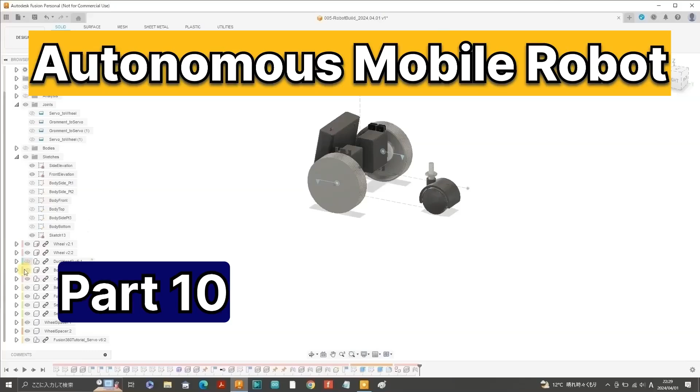In this video, part 10, we'll continue making progress with the chassis design. So let's dive right in.

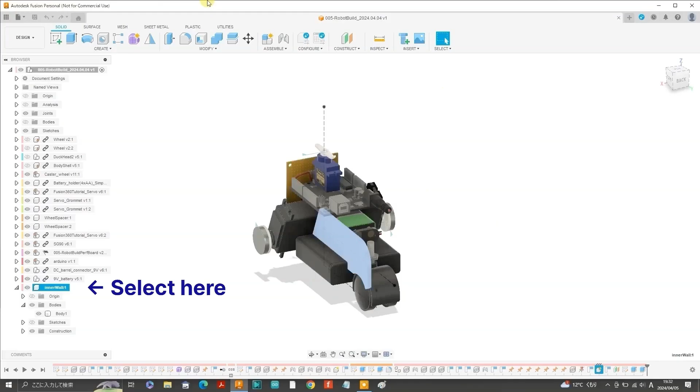We'll begin by duplicating the inner wall. Start by selecting the inner wall in the browser, then use the Move Copy tool, making sure to check the Create Copy option in the Move Copy palette. Move it by 26.4mm plus the 3.7mm thickness of the HDPE board. You'll now have two inner walls on either side of the 9V battery and the caster wheel guard.

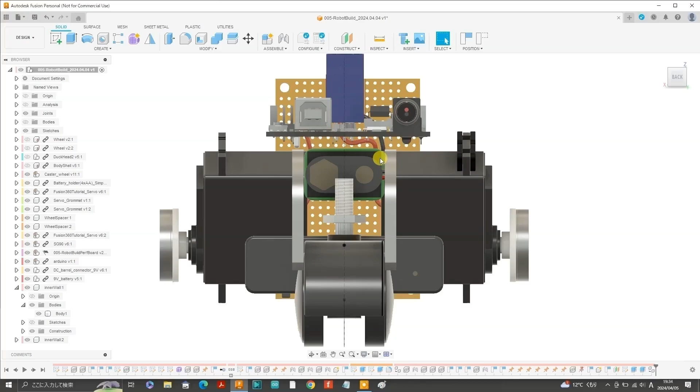Switch to the back view and note where the 9V battery wires extend. I've selected the outer face of the right inner wall. Now press P and select the peripheral shape surrounding the 9V battery wires and also the lower wire here.

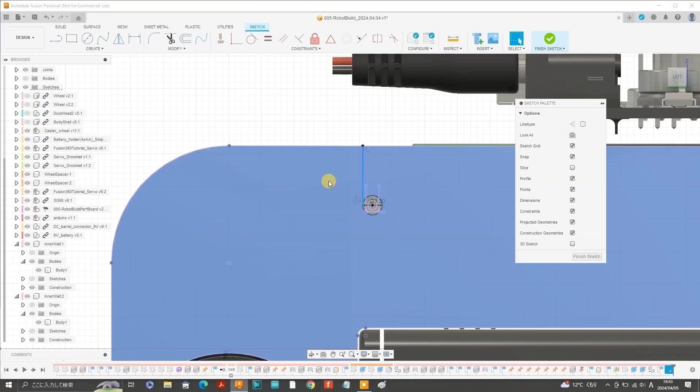We'll make a 3mm circle, draw a line segment, make it tangent to the circle, and make the end of the line segment coincident with the circle. Copy that line segment and make it tangent to the circle on the other side. Use the parallel constraint and then finish sketch.

Select the entire slot and extrude it by 3.7mm in the cutting direction. Now you can see the slots on both sides as the wall is a copy of the other.

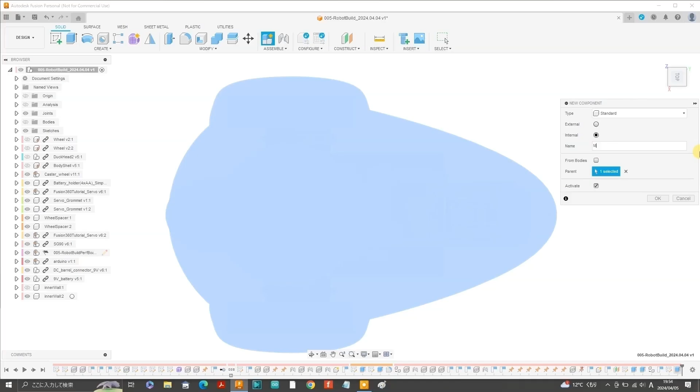Now switch to the top view and create a new component. I labeled it M6 18x1mm washer.

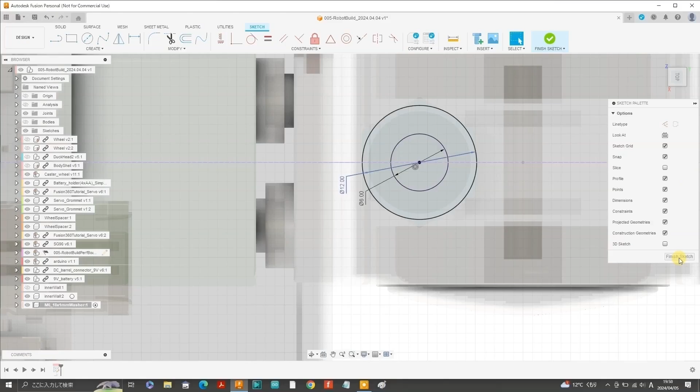Let's create a sketch on top of the hex nut of the caster wheel. Press P to project the vertical shaft diameter, which gives us the center as well. Make a 6mm inner diameter and a 12mm outer diameter. So this is not an 18mm diameter as I mislabeled the component. Finish sketch and extrude the washer by 0.5mm.

Again mislabeled as 1mm. Let's use a fillet of 0.1mm on either side.

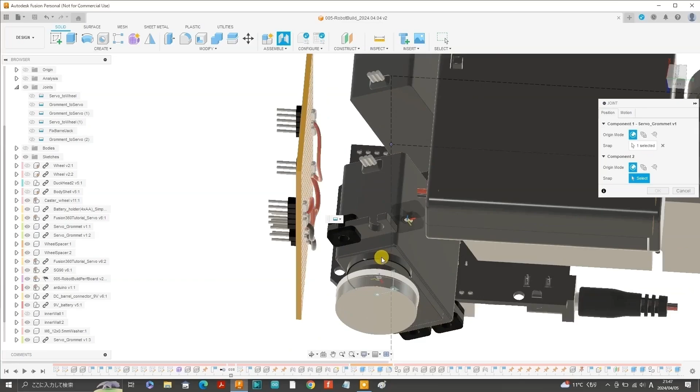We'll scoot over to the HS311 servos and add the remaining servo grommets by copying and inserting them using the joint operation. Now let's measure the distance between the center line and the inner face of the grommets on one servo, which measures 36.65mm, and likewise measure the distance on the other servo, and that also measures

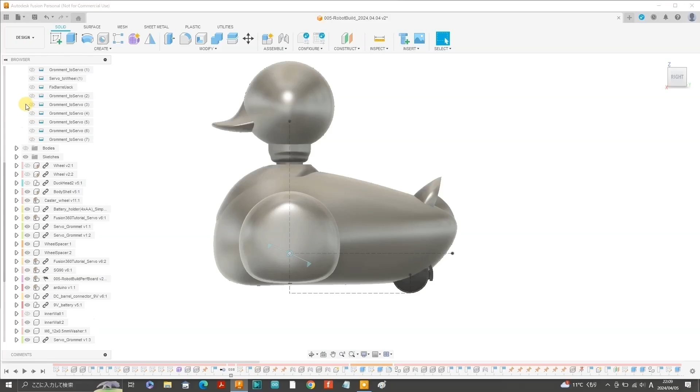36.65mm. Let's unhide the body and create a new component. Label it outer wall. With the outer wall activated, select the inner face of one of the servo grommets

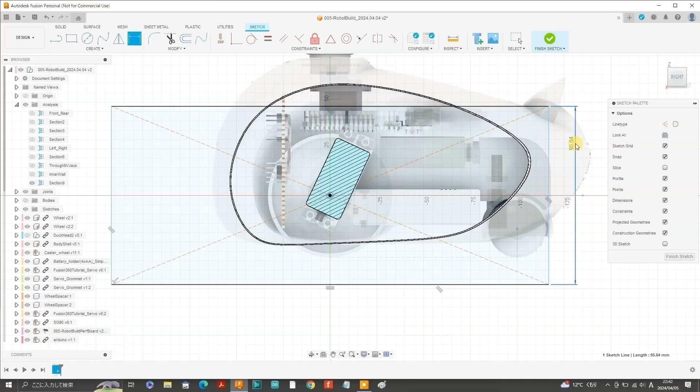and add sketch. Let's swivel the sketch around. Switch on analysis. Now create a rectangle centered on the origin, making sure it's large enough to cut through the robot body shell. I used

220x130mm, which is more than big enough. Finish sketch and extrude the rectangle by 3.7mm, matching the HDPE board thickness. And that's the start of the outer wall.

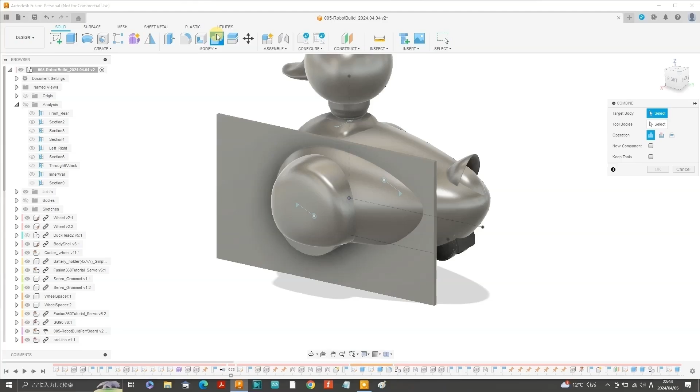But of course we're going to have to trim the outer wall. Use the Combine tool, selecting the rectangular wall as the target body and the robot body shell as the tool body, then hit OK. Now in the browser under outer wall you'll see two bodies. Just hide body 2, and if you hide the robot body shell you'll see the newly cut outer wall.

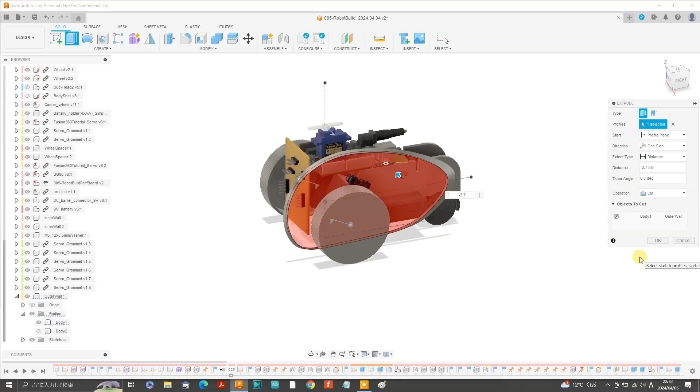Select the outer surface and do another extrusion of 3.7mm, but this time select intersect so that only the extruded part remains. Unhide body 2 and remove it.

Now let's copy that and move it by 73.3mm plus the wall thickness of 3.7mm.

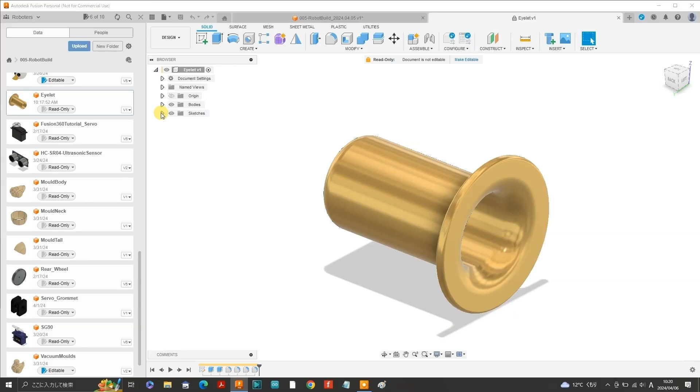Next, let's look at the eyelets. These fit into each servo grommet and a screw is inserted through them to mount the servo. The step file for this eyelet is available on my GrabCAD account. Check the description for the link. Each eyelet has a 2.4mm inner hole diameter, a 3.0 outer diameter for the small protrusion, and a 5.0mm overall

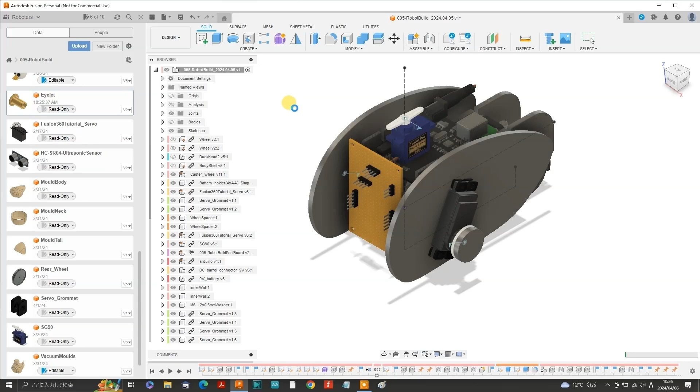outer diameter. Let's insert the eyelets into our design. We'll need a total of 8 eyelets, 4 for each servo. Make 7 more copies and use the joint tool to attach the eyelets to each servo grommet. Now each servo has grommets and their respective eyelets attached.

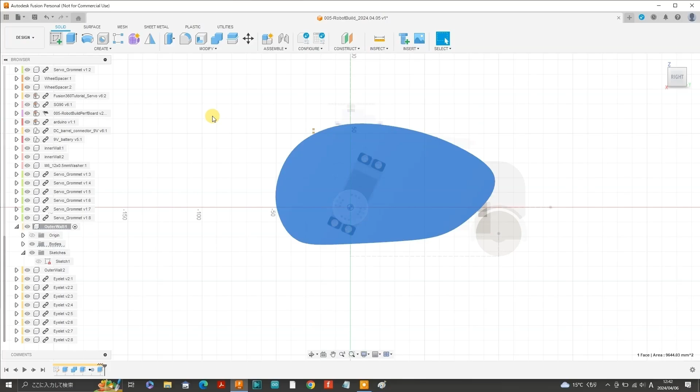Now let's work on the outer wall. So activate it. Select the outer surface and create sketch. Press P to project. Select the face to project the entire outline of the outer wall and project the inner diameters of the eyelets. Let's make some little 1mm holes to help the self-tapping screws along.

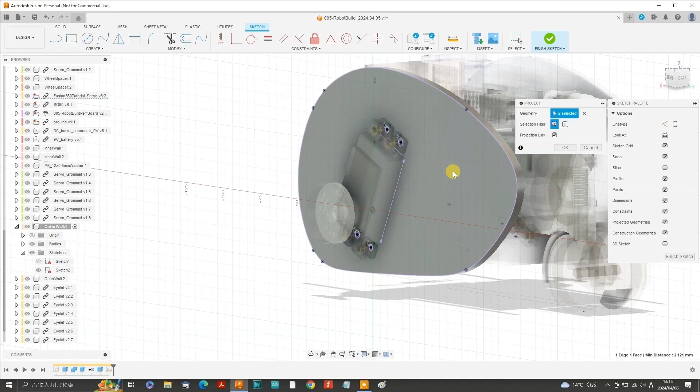We also need to form a rectangular hole for the servo body to fit through. Press P to project and just swivel the design around to help us select the servo body. Swivel it around the other side to select the outer side of the servo body. Select the upper and lower sides too, and there we have all 4 sides projected onto the current sketch.

Hide the servos for now. Here I have a line segment that I have made parallel to one of the projected sides, and let's apply a dimension of 1mm and do the same with the other sides.

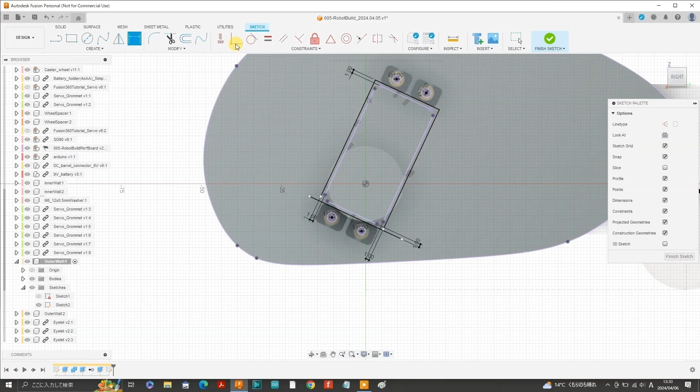Close the corners using the coincident tool. I ended up adjusting the dimensions from the side to 0.5mm instead. Finish sketch, select the rectangle and each 1mm hole. Swivel the design a little and extrude by -3.7mm, which will cut through the wall.

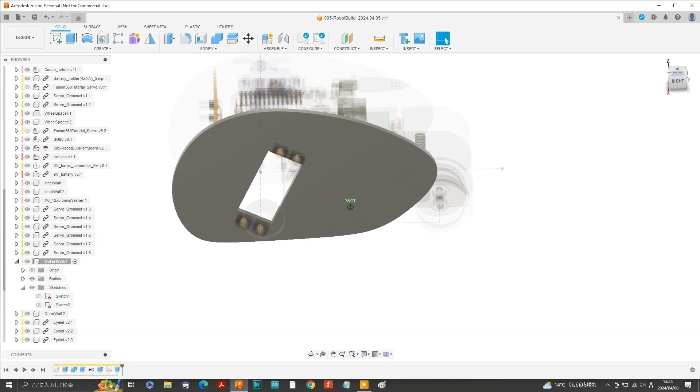Now we'll zoom in and select this corner to do a fillet operation, set to 0.5mm. Swing around to the next corner. We'll need to hide the wheel spacer to select this corner, then select the remaining 2 corners in the same manner. And there we have a rectangular hole through which the body of the servo can fit.

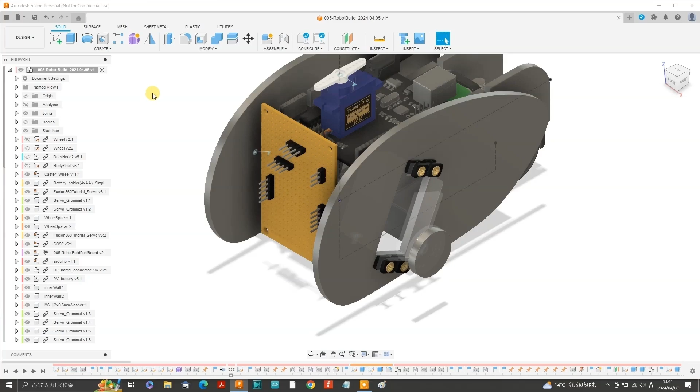Now unhide the wheel spacers and servos. Let's turn the whole design around and we can see that the exact same holes have been formed on the other outer wall because the other outer wall is a copy of the first one. Here's a view with the first outer wall hidden so we can clearly see the battery holder.

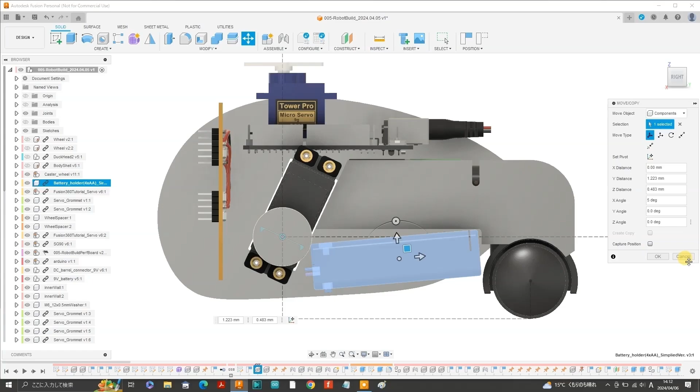Select the battery holder and then select move. I'm just moving the battery holder temporarily to visualize the removal of the battery holder to determine how much tolerance we need. We'll just cancel that to revert back to the previous position.

So we want to have some sort of hook or catch at the rear end of the battery holder. I initially sketched out a hook shape as an extension of the inner wall, but as you can see, upon extruding this shape, it became obvious that there isn't enough material for creating a strong enough hook.

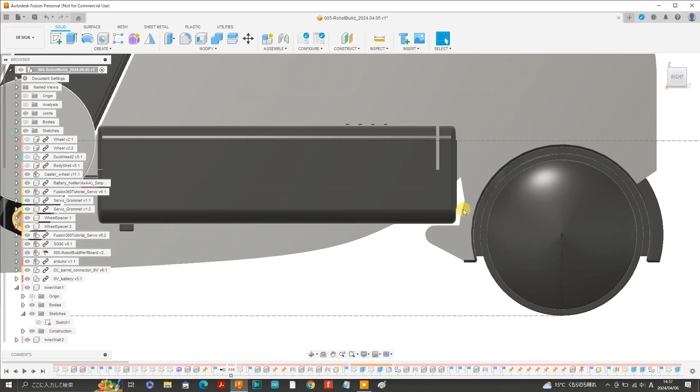Before we deal with that problem, let's first conduct a visual check to see whether the shape of the hook will allow the battery holder to be removed. And there we can see that there is enough room for the battery holder to rotate down and out from the underside of the robot.

Just hit cancel to revert back to the inserted position. Actually, I might reduce the angle of the straight edge here just to close up the gap a bit.

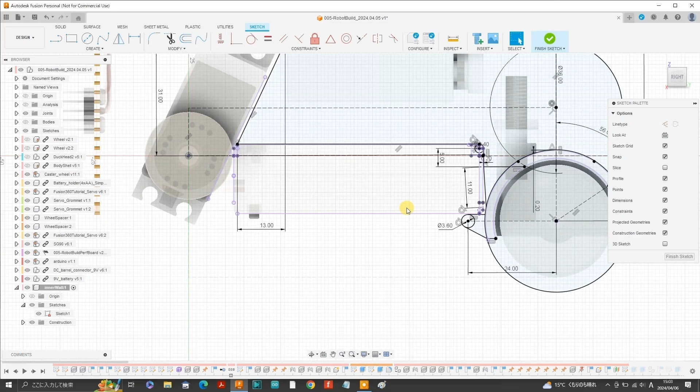Now let's zoom in at the rear side, viewing along the outside plane on the inner wall, and we can see that the plane is on the outer side of the caster wheel and does not interfere with the caster wheel. So I decided to create a subwall that lies on the outer surface of the inner wall, so we can delete the extrusion we just made and hide the sketch.

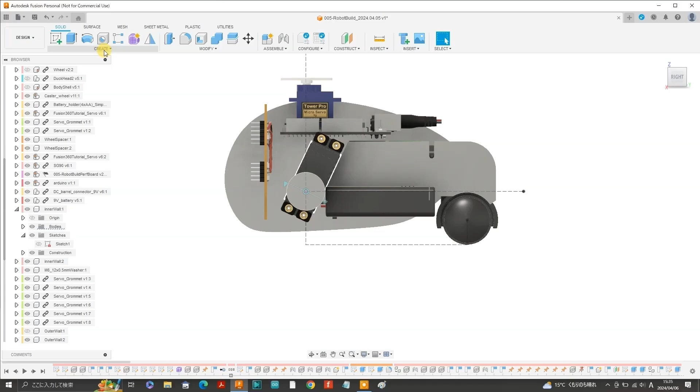Instead, let's create a new component and label it Battery Pack Rear Hook. Select the outer surface of the inner wall and create sketch, and unhide the hook sketch we created a moment ago to reveal the hook shape.

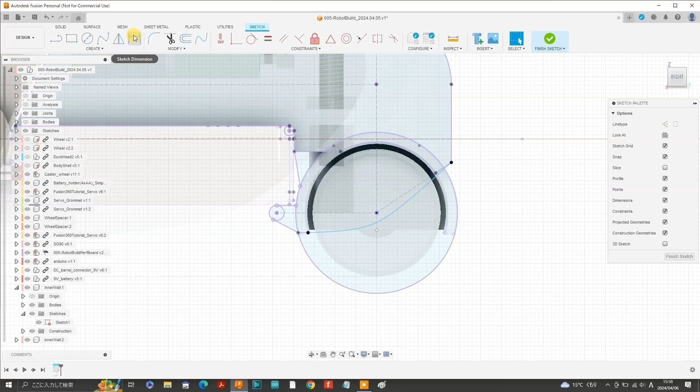Press P to project the shape of the inner wall and the hook, and then select conic curve from create. Connect these 2 opposing points on either side of the caster wheel, and I've set the reference point of the conic curve to 4.5mm from the center of the caster wheel.

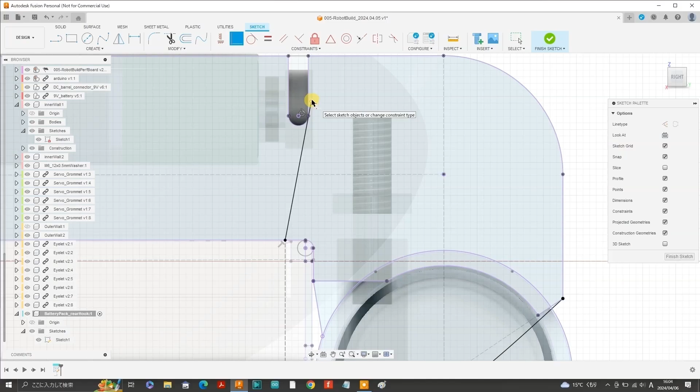Next, we'll extend a vertical construction line from this point on the hook to a horizontal line that was projected from the inner wall. From there, we'll draw a solid line to a random point here, make it tangent to this half circle and make the endpoint coincident to the half circle too. Finish sketch. Now select all the portions of the rear hook we are creating and extrude by 3.7mm.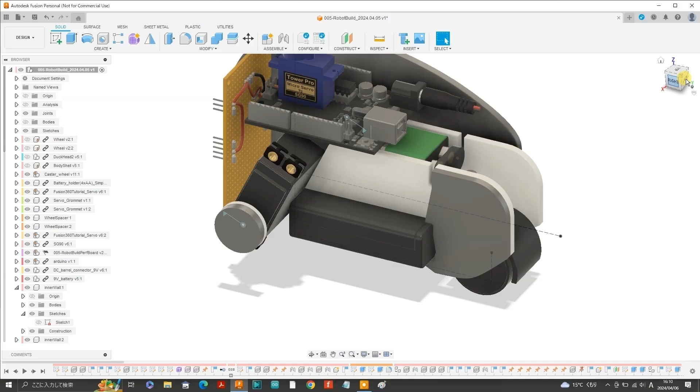Activate the main design, and just to visibly distinguish between the inner wall and the rear hook, color the inner wall by pressing A and dragging a white pigment onto the inner wall. So there we have the rear hook on the left side.

Now make a copy of that for the right side. But first we'll measure the distance between the outer faces of the left and right inner walls. In my case, I get a distance of 33.8mm.

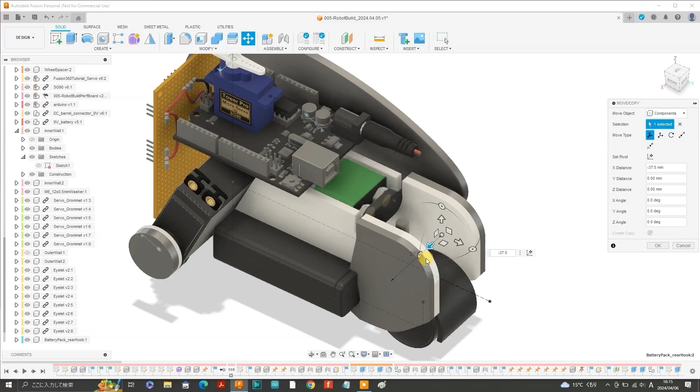Select Battery Pack Rear Hook on the browser, select Move Copy, select Create Copy on the Move Copy palette, and drag the copy by -33.8mm plus the wall thickness of 3.7mm, which is a total of 37.5mm. This brings the copy of the rear hook onto the outer side of the right inner wall.

Unhide the robot body shell, and we can see that a portion of these hooks actually penetrates through. Hide the robot body shell again, edit the sketch.

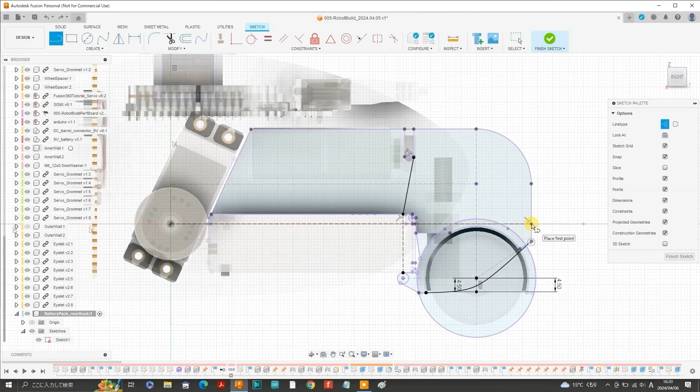I created a new construction line that intersects the rotational center of the servo. Delete the conic curve we previously created and create a new conic curve from the center line that extends through the center line of the servo.

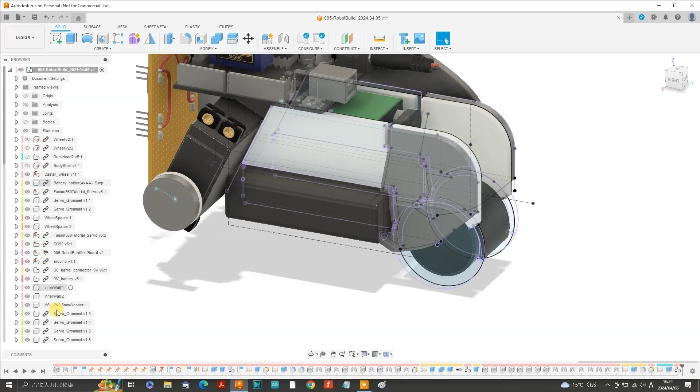Finish sketch. Now we need to edit the extrusion from the timeline. Unselect all the profiles and only select the profiles you want to extrude. Hide the sketch and unhide the body shell again.

Unfortunately, there still is a little corner penetrating through the body shell. A section analysis will give us a better visual. Yes, here we can see the problem very clearly.

It's actually the inner wall that's poking through, not the rear hook. Apply a fillet on the corner here. 10 millimeters should be more than enough.

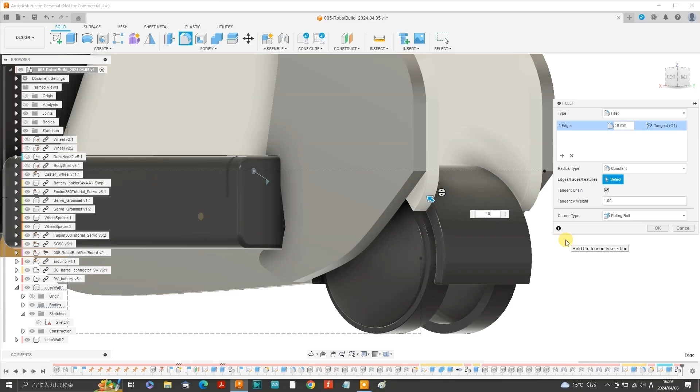Unhide the robot body shell again. Nothing seems to be poking through now. Switch on the section analysis to check. And as we can see, the inner wall no longer interferes with the body shell.

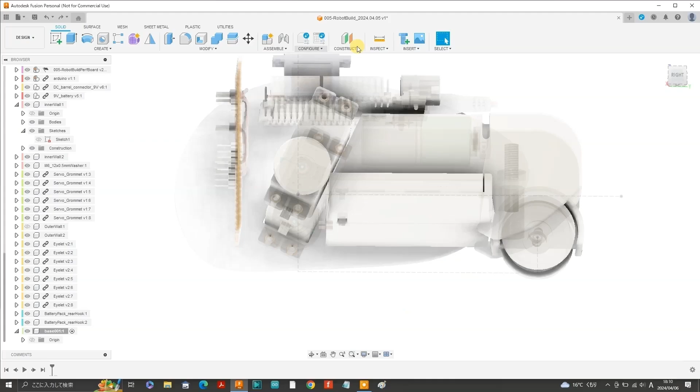Let's hide the left outer wall, tilt the robot sideways a little, and create a new component. Label the new component Base 001. Create an offset plane from Construct, and select the underside of the battery holder for the position of the offset plane, and create a new sketch on this plane. I like to orient the sketch this way.

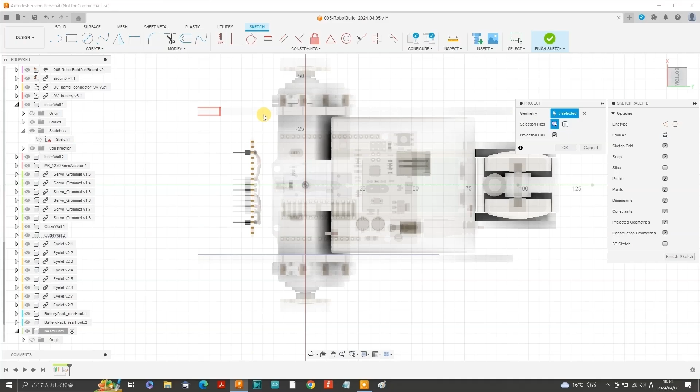Press P to project some of the components onto the sketch. Select the inner side of the outer wall. We'll need to unhide the outer wall too. Select the other outer wall in the same manner. We'll also select some edges of the left and right servos, mainly for reference purposes.

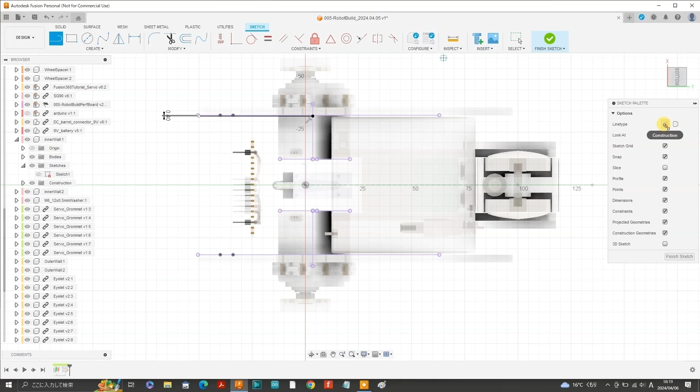Start sketching the base by sketching a line parallel to the projected inner edge of the outer wall. Then use the dimension tool to set the clearance between these two lines to 0.4 millimeters. Now mirror that line about the central axis. Dimension this line at 54 millimeters.

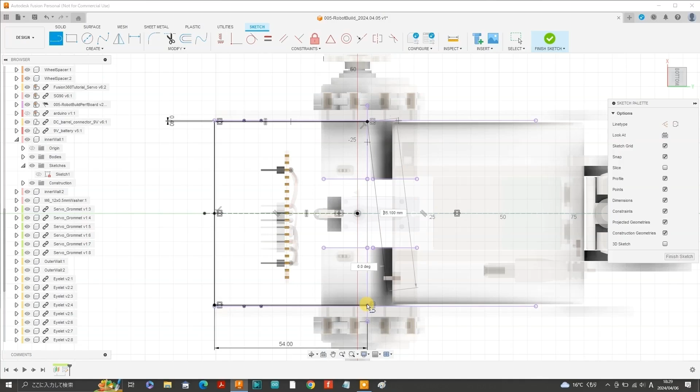Sketch a center line towards the front and sketch a solid line from the top edge to this center line, and mirror the solid line about the center line. Connect the two rear ends of the two parallel lines with a rear solid line. Finish sketch. Select the profile of the base and extrude by 3.7 millimeters.

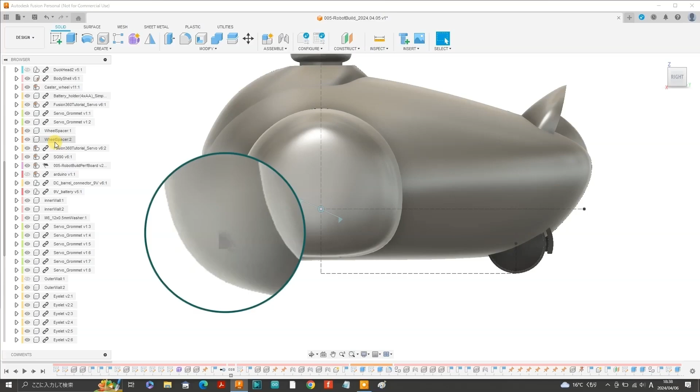I'll just activate the entire design. Hide the left outer wall. Let's have a good look at the base we've just extruded, and we can see that it sticks out at the front side from the outer wall. Unhide the robot body shell, and we can see the front corner of the base penetrating through the body shell. Switch on the section analysis, and we can also see the rear end of the base interfering with the servo.

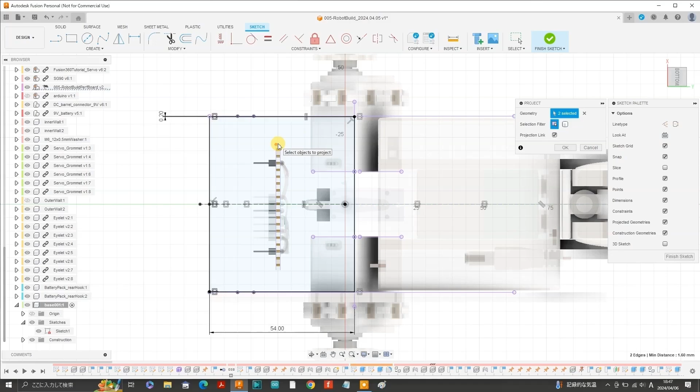So let's get back to the sketch of the base and edit sketch. Actually, I decided to tighten the tolerance at each side to 0.2 millimeters, so a total of 0.4 millimeters. We'll also need to create an opening to allow the circuit board to go through. Press P to project and select each side of the circuit board to project those lines onto the current sketch. Next, we select those projected lines that define the thickness profile of the circuit board.

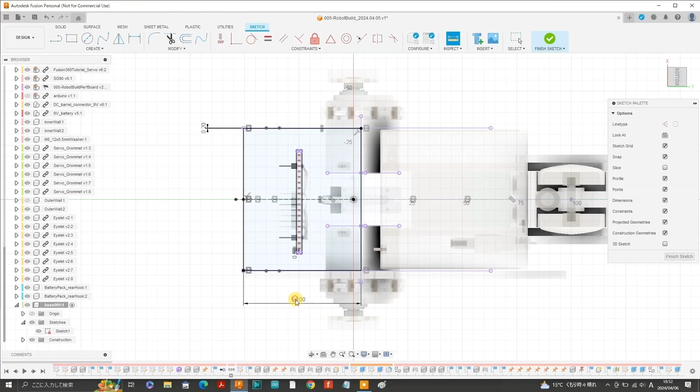Then select the offset tool, and the offset tool automatically sets the offset position to 1 millimeter, but we'll set the offset to 0.5 millimeters. Next, we'll need to shorten the length of the base, so I'll shorten it by 10 millimeters down to 44 millimeters. Finish sketch. Immediately we can see that the front of the base has shortened.

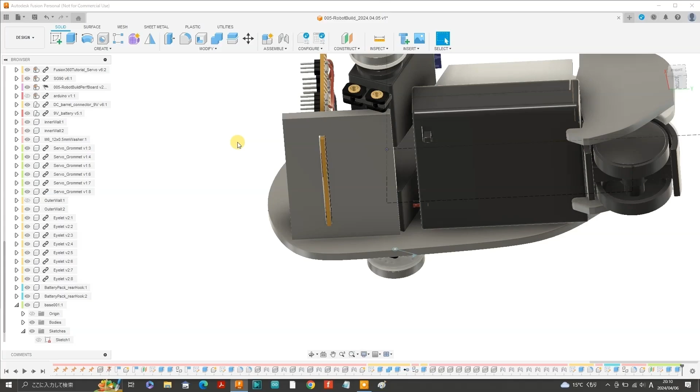Now we need to extrude the opening for the circuit board. Here's the base with the opening already extruded out. I don't have the footage for the actual extrusion operation, but make sure you hide the circuit board when you do the extruding. Next, we'll deal with the rear end of the base that currently interferes with the servos.

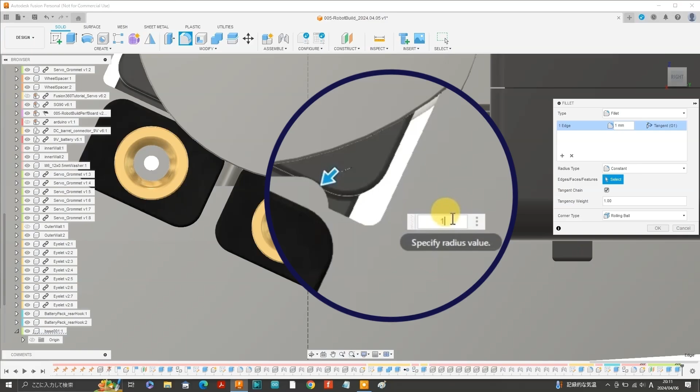Hide one of the servos, zoom into this top corner, which is interfering with the servos, and select the corner. With the corner selected, we can move to the side elevation and perform a fillet operation. A 1 millimeter radius wasn't enough, nor was 1.5, so I settled for a 2 millimeter radius.

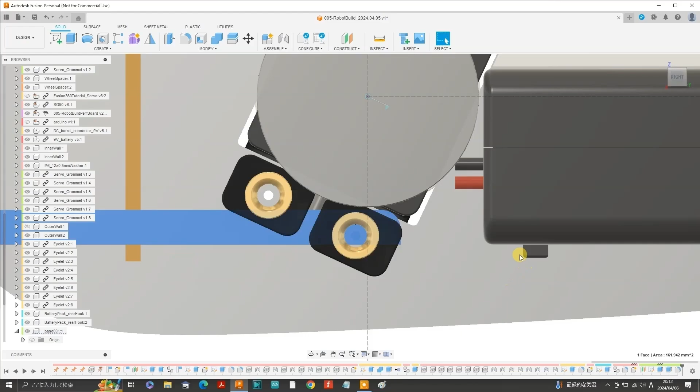Okay, so I don't like where the position of the self-tapping screw is relative to the thickness of the base. It would have been fine if the screw was aligned exactly in the middle of the thickness position of the base, but it isn't, so we'll carve out an opening in the base to make way for the screw if needed. So go back to the underside and edit the sketch again.

I put in a 10mm construction line, though you can't really see the line itself, then a 7.5mm vertical construction line. From Create, select Slot and create a 10mm center to center slot with a half width of 7.5mm. That slot isn't constrained, so we'll make the half width of the slot coincident with the 7.5mm dimension.

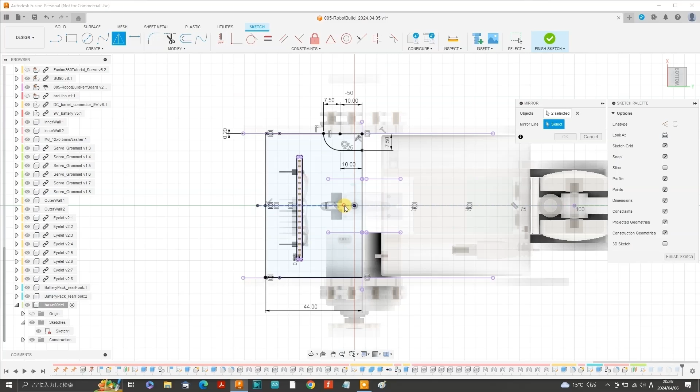This works until you use the cutoff tool to remove the excess lines of the slot, but that can be easily fixed by adding a few dimensions with the dimension tool. Now mirror that shape about the central axis, activate the base and cut those shapes out with Extrude. We probably don't need to have that large a space for the servo screws.

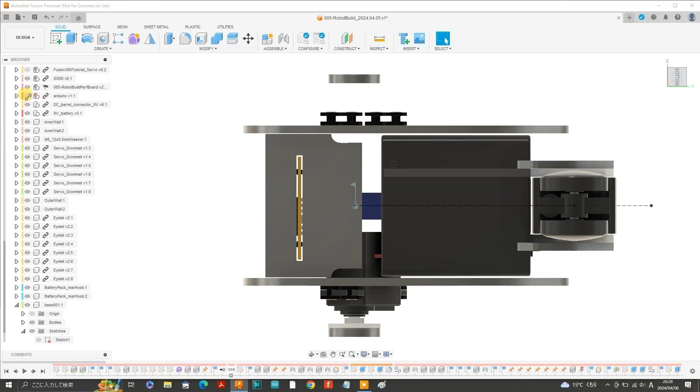Edit the sketch again, adjust the width of the slot to 4mm and also the radius. Finish sketch. And there we have the base with the left and right openings adjusted according to the sketch. Unhide the servo. I'll just hide the left outer wall to get a better look. Let's color this white for better visibility by pressing A and dragging a white color onto the base.